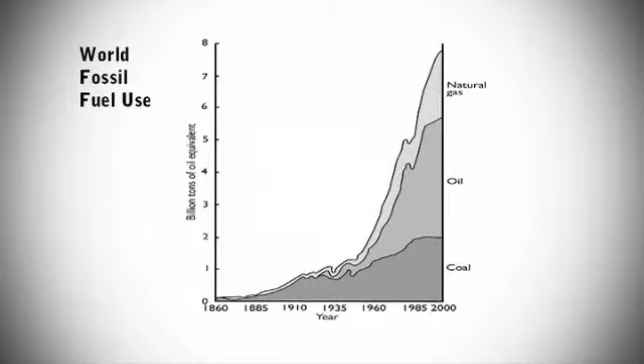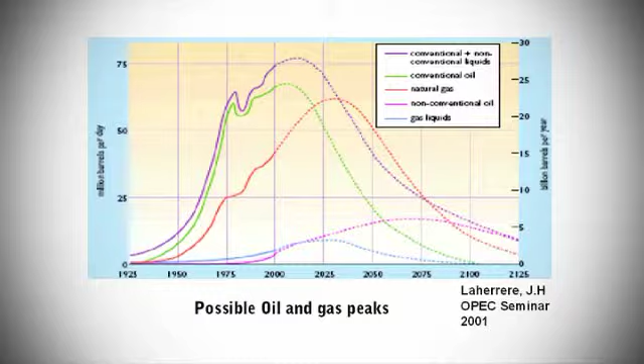Quick run through. We all know the story. We've been using lots of fossil fuels. Rate of fossil fuel use has gone up with the industrialisation process. One of the possible issues that's been worrying people for the last few decades is the imminent shortage, scarcity or increased price of various fossil fuels. That's at traditional oil and gas peaks, but people have also been talking about coal peaks and maybe even uranium peaks, solid material peaks of resources. But long before we reach that, it's argued, maybe before we even try to reach that, we should stop using these scarce resources because of the other big issue, which is the climate change one. The debate is out whether climate change comes first or peak oil comes first.

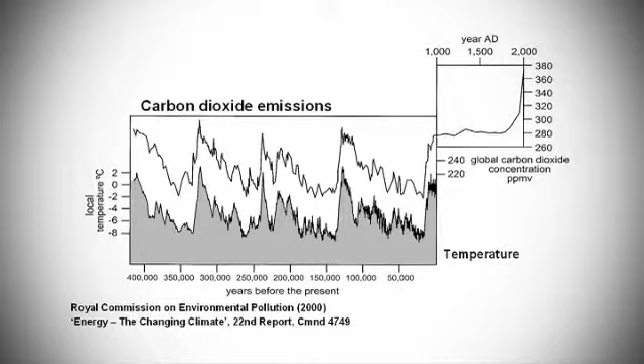You know the climate change story. The level of emissions has shot off the chart, and it looks like the temperatures are following, although we can't be certain quite how tightly they're following. Predictions, though, show us going up into the 4s and 5 degrees unless action is taken. So that's our starting point. Does it matter? I mean, if it didn't matter, we could just enjoy the ride. On the left here is what happens if all the seas expand at 6 degrees and all the ice caps melt. Which means Birmingham becomes the capital of the UK, which is enough motivation, I think, to make anybody act quickly.

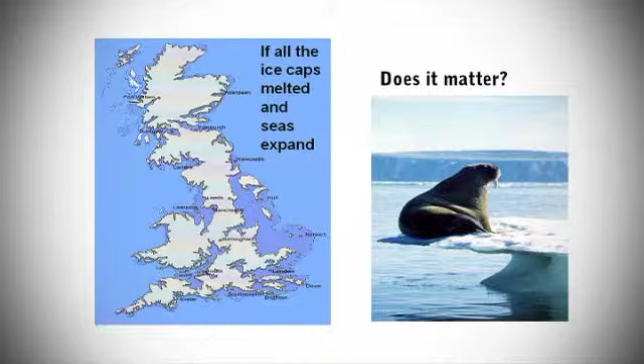On the right is the sub-story for the Guardian front page as to another reason why you might want to respond, but carries less immediate impact as far as I'm concerned. But the financial argument, this economic argument, is also strong. The control cost, the cost of doing something, is significantly less than the cost of not doing something, by something like a factor of 10 or 5, depending how you want to do the sums, according to Stern. In which case, action taken now makes sense.

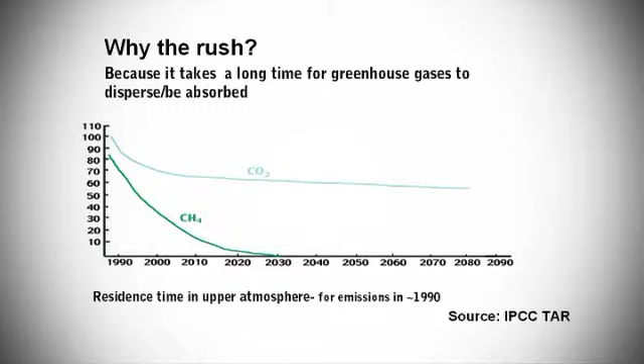There's a reason for moving quickly, because carbon dioxide has a long residence time in the upper atmosphere, despite the interchange between sea and sky, much longer than methane. Effectively, once you put it up there, it's there for a long time. If we stopped at year 0 or 1990 there, we'd still be at more than half levels many hundreds of years later. So the earlier you start making reparations, the better. And the longer you leave it, the more it's going to cost you. So urgency is the issue.

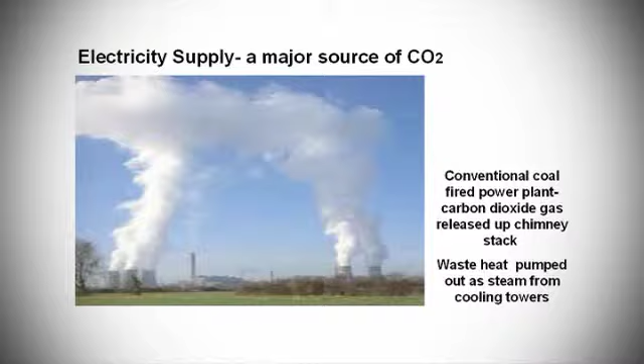Engineers look at pictures like this on television, and the voiceover says, climate change. And they say, well, there's an awful lot of steam going up there, yes. That's not much of a problem. Well, it's a little bit of a problem. But actually, the real problem, as you know, is coming out the chimney in the middle. But also, this steam is another giveaway. If you're an engineer, you say, oh yes, why have we got this vast amount of steam coming up? We'll have a look at that in a minute.

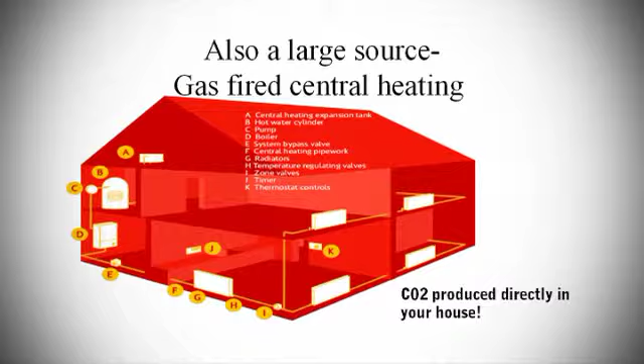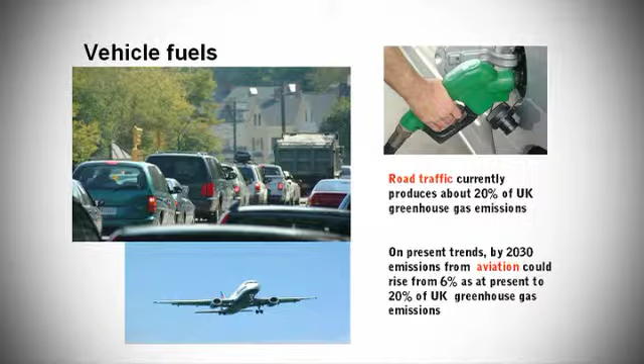The elephant in the room that I keep trying to bang on about is that we keep talking about aircraft and power stations and cars. We forget that every single house has got a gas boiler sitting in there, churning out carbon dioxide in your own home. Probably about 40% of total carbon dioxide is coming from this machine in the corner of your basement or wherever it is. And yet we don't mention that much. Gas boilers, even combi boilers or condensing boilers, are a major source. But of course, we're all familiar with the guilt-tripping aircraft and car use arguments for climate change. Those are the three big areas anyway: power stations, gas, and transport.

What can you do about it? Here's a list of actions. Sequestration, somehow or other capturing and storing the carbon dioxide; using lower carbon fuels, switching to gas from coal, which is a 40% change if you're doing it in an advanced combined cycle plant. Generate the energy more efficiently, stop voiding so much steam, combined heat and power. Use fuel more efficiently when you actually produce it, get more use for less energy.

Use non-fossil fuels. The two obvious and only options at the moment are nuclear and the various renewables. Then there's a whole series of social solutions, which I'm not going to look at. Steve Peake later may talk about some, which is we use less or change our lifestyles to use energy in different ways. And then finally, there's another area of adaptation. If all the above fail, we just take it on the chin and see how to adapt our way of life and our planet and our living style in response to climate change.

Now, the more you look at this, the less chance there is of being able to adapt to the scale of change. If we're up to 6 degrees, then the scale of adaptation becomes probably beyond what most countries could afford and what most people can accept. So I tend to want to treat these as not just first tries. These are desperately important, all these earlier stages. We can't just sit back and wait to adapt.

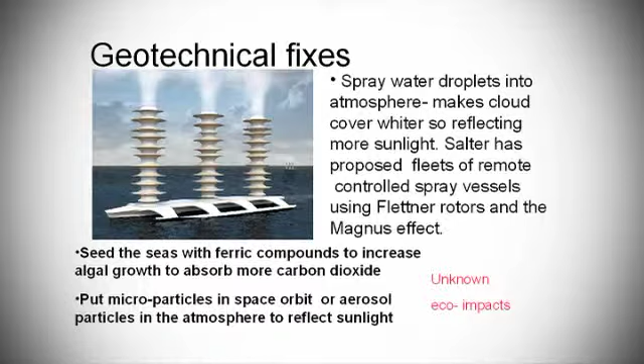I think there was just a question in terms of the size of the towers. Yes, the previous slide. The scale of the towers that you showed us on the previous slide. I think this is a sort of size of a major cruiser, not a full battleship, but something like that, big. No people. Remotely operated. They cruise around the sea, fleets of them, hundreds of them, looking for crucial places to... I'm trying to be straight-faced here, but I do find it a little bit wacky.

These rotating towers generate the energy to squirt the water vapour up into the sky. There's tidal energy connected to drive it around. It actually steers itself around. The idea is to find places where you can have maximum impact, because you want to avoid precipitating rain in some areas. Other areas you do want to. You're doing climate modification on an international scale. So the sums look... in energy terms, it actually does work. You could do it. Sorry.

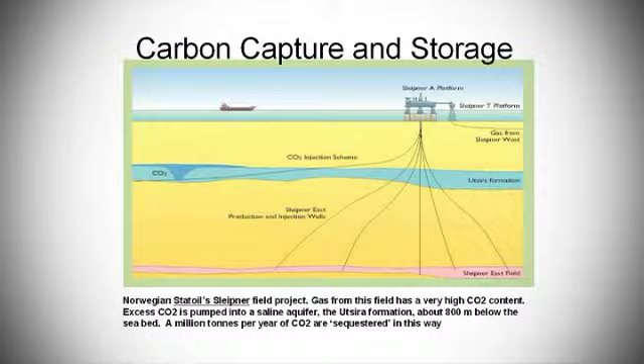It seems sort of symmetrical to take some oil or methane out and then burn it and grab the carbon dioxide and stuff it back down again. There's a sort of symmetry, but otherwise, in engineering terms, it seems pretty inelegant to try and drag stuff out of the exhaust of power stations and stuff it underground under pressure and hope it stays there.

The attraction is that it allows the oil companies to carry on much as before, except it now costs them twice as much. So the attraction of carbon capture and storage is it allows the show to continue for a period. I find that a little bit evasive. This is really bad engineering, sticking something on the end of the pipe and squirting it into the ground. But it can be done, and I'm sure it will be done, because it allows you to carry on burning coal, oil and gas for some period.

Much more technologically sweet, if you like, is dealing with the problem that's nearer to the source and avoiding energy waste in houses and other buildings by all the obvious energy-saving building envelope design and add-ons to improve the energy efficiency.

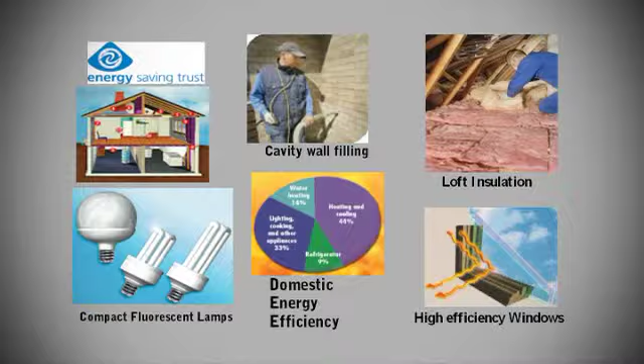I mean, the Finnish Minister of Energy came over a few years back to talk to us and said he couldn't believe that 6,000 old-age pensioners die in Britain every year of the cold. He said in Finland it gets cold and people die, yes, but never indoors. He couldn't imagine how we could have buildings that would kill people. So there are things you could do to improve buildings. And this country, having just a low starting level, there's a lot of room for gain there.

Wave energy is harder. You're dealing with an interface between air and water, which is chaotic at the best, whereas underwater water turbines, you've just got 4 movements of the water every day in a nice laminar flow 20 feet under the surface. Submarines are much easier to build than ships. They don't have to take so many stresses. Some examples of underwater wind turbines or tidal current turbines. The big area, I think, of development is Britain's strong card. We have a very big resource of horizontal tidal flow, and we fortunately seem to be at the front of the technology of that at the moment.

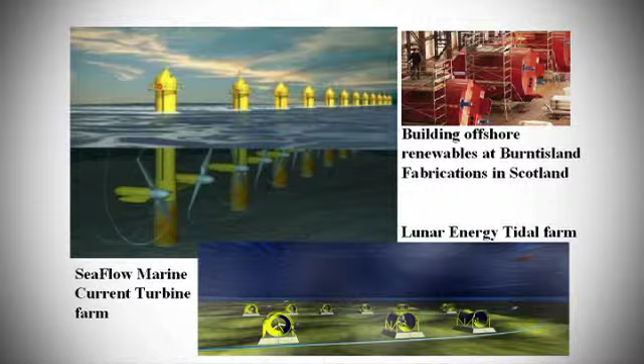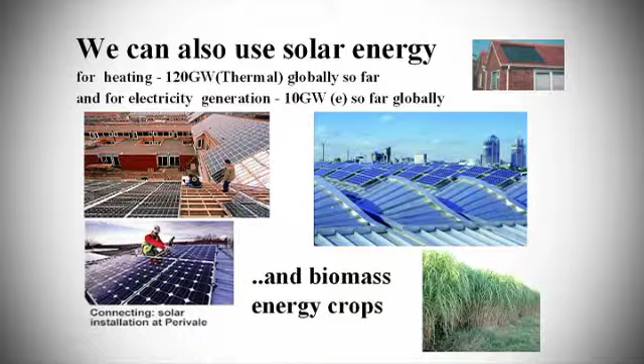Now those sort of numbers kick around for most countries, and this is now looking fairly conservative. 50% by 2050 seems to be the going rate; most industrial countries can achieve that if they want to. And of course a lot more. This is just the relatively straightforward approach. So that's your ballpark, half electricity by 2050. Now, we may need to do a lot better than that.

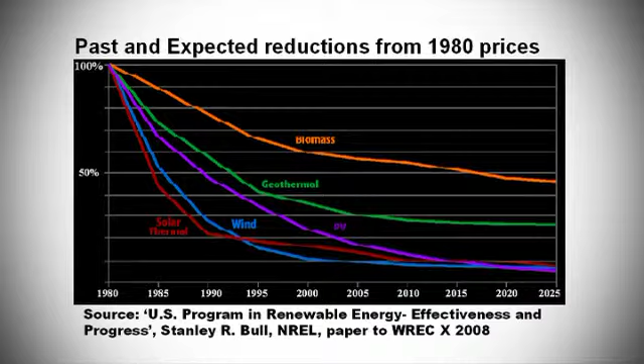The price is the other thing that is interesting. That's dropping as you would expect as the technologies physically develop and the markets for them expand, the unit cost goes down. Here's an American NREL study showing the percentage drop since 1980, with wind dropping very fast, biomass not so fast, PV very fast.

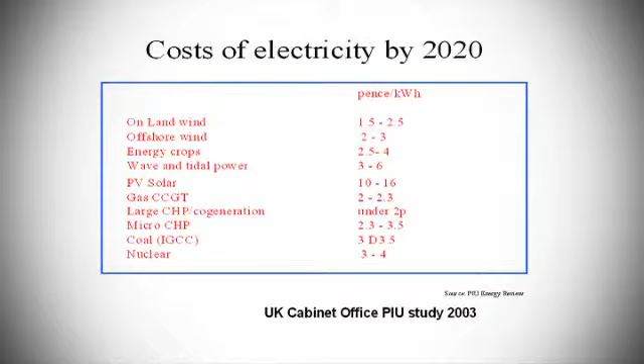The UK Cabinet Office did a study. Some people here, I think, were involved with it. I was as well, briefly. For 2020, electricity prices for the various options. So you can see the renewables all looking very competitive. The more traditional coal, gas and nuclear looking not so competitive. That was a few years ago.

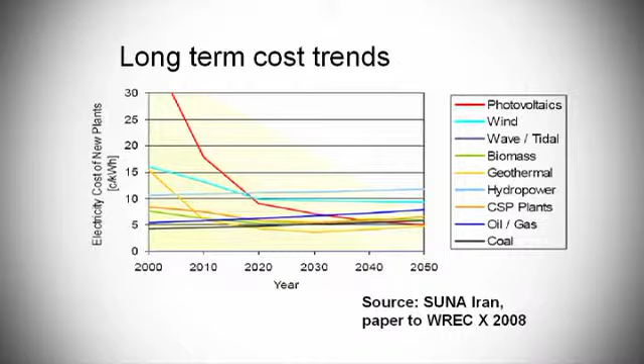Here's the most recent study I've come up with showing long-term costs, sort of learning curves basically, by 2050, with PV the most dramatic reduction in price, photovoltaic solar dropping very rapidly. This, interestingly, is from Iran, should you be interested in taking an interest in renewables. Most of the fossil fuels are seen as just sort of chunking up in 2% a year price increases.

Okay, here's where I'm going to try and move to a quick look at the renewables by scale. The full shopping list looks like big stuff, but in fact, small stuff is equally important, or can be equally important. So the scale is house level, the city level, the country level. So at the house level, people often argue small is beautiful. Small generators can be nearer to the load, therefore there's less losses in the transmission. You can overstate the losses in long-distance transmission, maybe 10% over a thousand miles. So building a technology into a house has some attraction.

And as you'll be aware, the last few years we've seen a whole range of so-called micro-generation technologies, micro-wind, PV, solar heating, small-scale combined heat and power, and heat pumps and fuel cells and all other mixtures of not totally renewable, partly fossil fuel-fed options, but all small, kilowatt-sized machines to be built into houses. And there's a lot of talk about this.

Now, the problem is, back to the engineering again, simple physics of wind generation: it's square of the diameter of the blade, cube of the wind speed. That means if you go up, you get a vastly more increase in power. If you go down, your power drops off very rapidly.

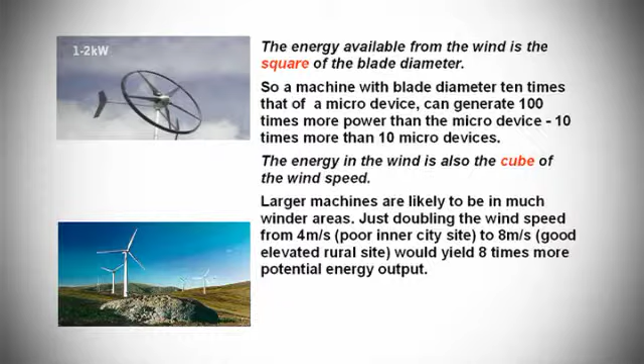So a tiny wind turbine, the 1 to 2 kilowatt, the iPod of the micro wind world, is the machine up there. You're going to get very little energy out of it, particularly in urban environments. The Building Research Establishment study suggested that the small turbine on top of a building like that, and that's a particularly good site, that's a tall building. In many urban environments, you're not going to get enough power to pay back the original energy debt, the materials and carbon invested in the construction, much less the actual cost debt.

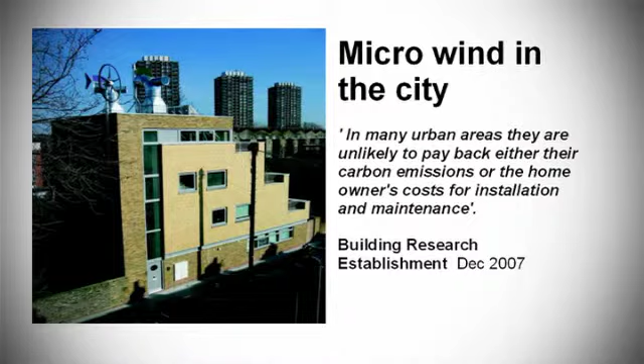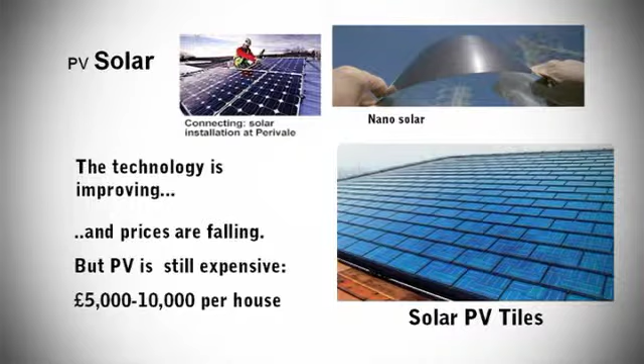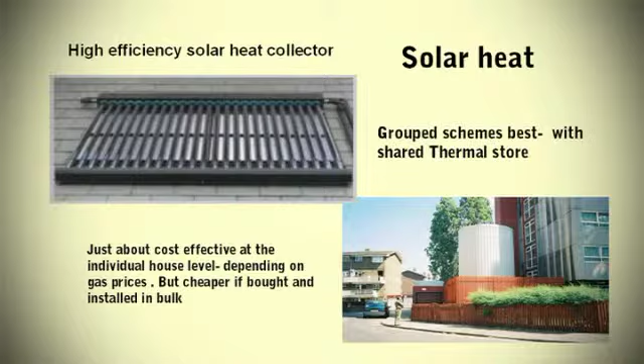So the initial enthusiasm for micro-wind is somewhat reduced, but there are locations where small-scale wind will work. PV, a bit different. There's no scale issues on that. You can have it any size you like. Volume efficiencies. Solar heating, again, there are some scale attractions. Very large solar arrays across a whole row of buildings where you share a heat store, because this is a Danish heat store, gives you some advantages. If you have a heat store scaled to 20 houses, you get much better storage capacity than if you have 20 individual heating units, because the volume and area effect are different.

But small is clearly not always beautiful. Interesting report from the Energy Saving Trust last year saying basically until you get up to about 500 houses, the costs are prohibitive, but around about 500 you start getting advantages. What they're basically saying is that the community scale is the best scale to operate on if you're talking about localization of technology. Community scale, depending on how you define community, small enough to be technically located locally, but also big enough to be reasonably economically efficient, small enough to be locally controlled or possibly even owned, possibly even managed, but big enough to be not a waste of time in engineering terms.

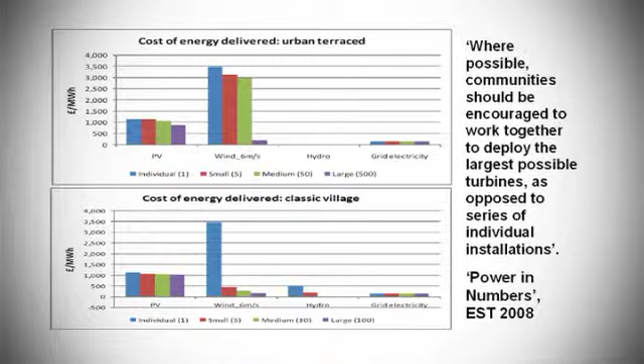CHP, well, micro-CHP also got a fairly big push behind it. The trouble is, the way they've been set up at the moment, they're following the heat load. You run it for heating. Electricity it produces is additional, which means in the summer you're not likely to be running it much at all, which means your overall annual efficiency on the electrical side is very low. So I have a bit of a rethink of the viability of micro-CHP as a total energy system. So we begin to see some of the disadvantages of small scale.

If you move up to bigger CHP, it's digging streets up, connecting up big heat loads, which of course has happened widely in the rest of Europe, but hardly at all in this country. Your efficiencies start jumping up dramatically to sort of 70s and 80% total energy efficiency.

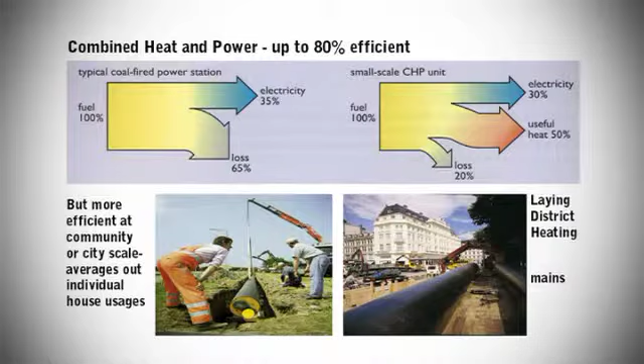One area that's done this is Woking Borough Council, who've CHP'd a lot of their area with a local heat grid and also a local electricity grid. They've decoupled themselves to some extent from the national grid system, providing electricity power on a private wire network around municipal offices and a few schools, hospitals and hotels and things. About 70-odd% of Woking's large buildings now are on the local borough council's energy system, heat and electricity.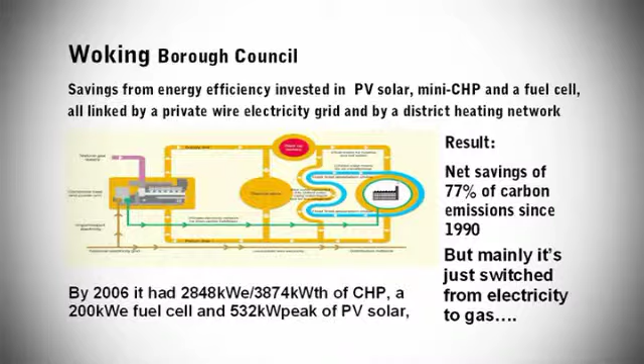The result is since they're mostly generating off gas now rather than electricity, they're still importing stuff, it's gas they're using, but they've switched over to using gas for electricity, and that's reduced their carbon impact by a significant amount. But of course they're still importing gas, so it's not an autonomous system.

The same for some of the London proposals. The late lamented Ken Livingstone's plan for London was, well, here's the full width of it, but the upshot of it was, at one stage anyway, to get 14% of London's electricity from renewable sources. Not a lot, 14%. When you actually look at the small print, only 4% actually would be coming from internal in-London generation. So all the rest would be imported.

So what I'm trying to argue is that the small-scale dream that we can do it all locally is very attractive, and we should do as much as we can. But it looks like, in reality, for the moment at least, it's always going to be a small player. There's always going to have to be a lot more imports from somewhere else, the rest of the country to start with, or perhaps further afield. PV solar is the big hope for the future. I'm going for big here.

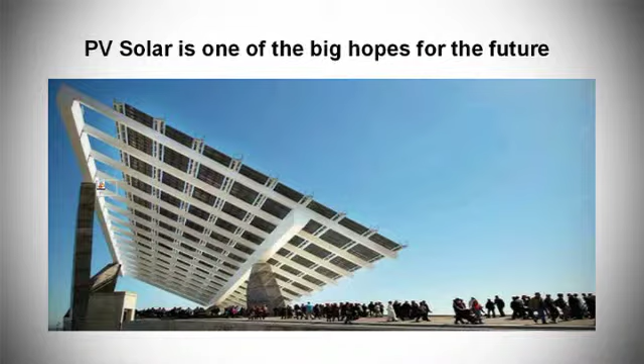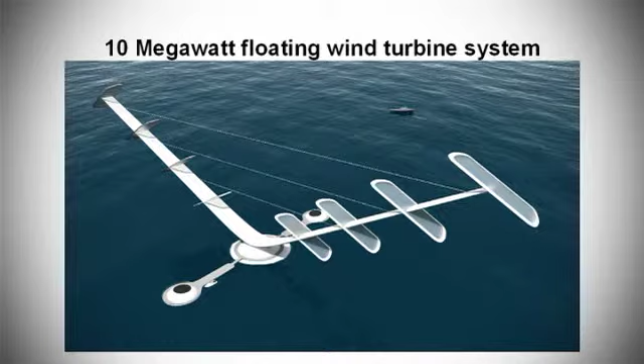I've mentioned before tidal stream. There's some big tidal stream ideas. Big wind. At the moment there's a 5 megawatt wind turbine being built, but this is a 10 megawatt design concept. When I let the engineers loose on the drawing board, they come up with, I mean, you asked earlier how big. Here's the cruise ship now to give you a scale there, right.

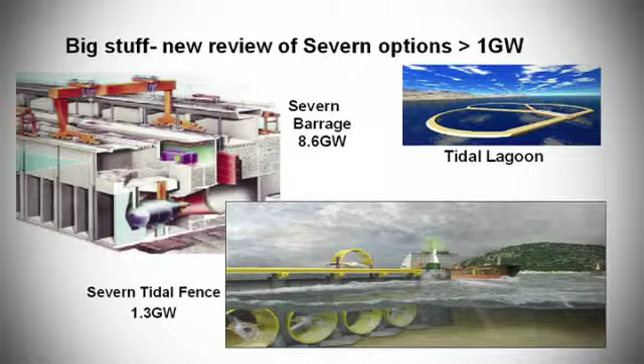Big machines. This is a horizontal axis machine, right. You can see the engineering moving on and delivering increasing amounts of power. Big marine technologies like the Severn Barrage, 8.6 gigawatts, or possibly better, a tidal flow system that doesn't block off the whole estuary, where you have turbines that allow just the water to pass through.

Costs. Just out of interest, the Severn Barrage up there at £30 billion, the largest civil engineering project a country ever thought of. Very expensive in pounds per megawatt hour. Why you do it, I've no idea. I'm very uncertain about that. Wind around here, nuclear is sort of in the middle. This is one particular chart. When you challenge economists, you'll get charts with figures that differ. These at least have got some ranges on.

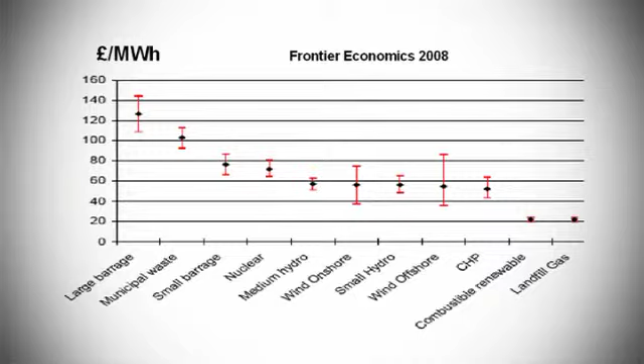Since I mentioned nuclear, let's just dispatch that to the oblivion it should belong to quickly. Can't help much in the short term, 10 years to plan and build the things. Can't help much in the very long term. There's not enough high-grade uranium to go beyond, being optimistic, 100 years. If you're talking about dealing with climate change on a significant scale, then you run out of uranium. Not you run out, the prices get very high.

In the meantime, between the long and the short time, you're facing all the obvious problems of accidental leaks and emissions, long-term disposal of active waste. I notice Obama has just abandoned the Yucca Mountain project in America, so America still has nowhere to put its waste.

Your local friendly Iranians will no doubt be interested in not making bombs from their nuclear power plants, and people have called nuclear power plants pre-deployed nuclear weapons that we've equipped our countries with for terrorists to use. I think that's rather overstating the case, but it is not wise, I think, to have more plutonium as the basis of your future energy system. I would prefer not to do that if there are other options, and it does seem plainly there are.

Most of the renewables are much faster to install. You can put a wind farm up in months. They're cleaner, there are no emissions from wind or solar or whatever. They're safer, not too many people fall off roofs when installing solar collectors, although they do. No emissions, no waste, no proliferation, no terrorist threats, no fuel resource depletion. It seems like an obvious option.

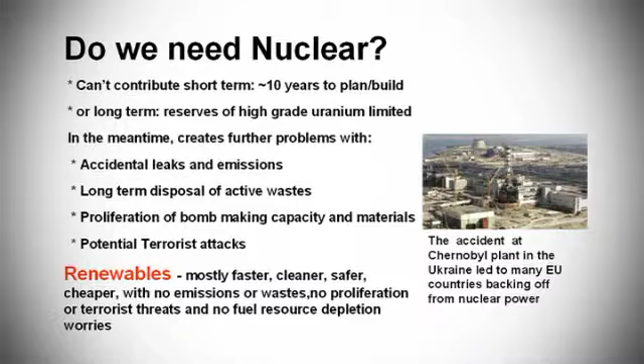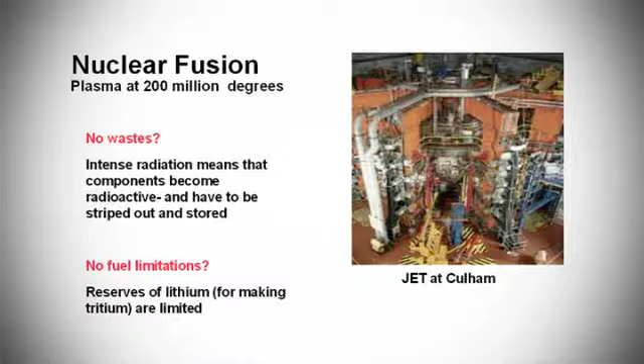People, though, do say, well, yes, renewables is very nice while we sort out fusion. I used to work in fusion for a bit. I always get a bit annoyed when people say this solves the energy problem, A, because there's no waste. Well, no, everything inside this thing gets fiercely irradiated by neutrons. You have to strip out all the materials and store it somewhere. Maybe a couple of hundred years worth of radioactivity by induced radiation, but still not a non-issue.

Fuel limitations, well, lithium is where you get the tritium from, and we're busily using lithium up in not just PCs, but cars. And increasingly, there's going to be a battle for lithium in the future. Fortunately, there's lots on the asteroid belt. So if we do crack fusion, we can build spacecraft to go to the asteroid belt to get the lithium to run the fusion reactors.

I asked the Atomic Energy Authority a couple of weeks back, in fact, a big report they sent me really surprised me. They said, if we can crack fusion, and they're trying to spend another £20 billion, half our R&D budget for all energy goes on fusion, it might, by year 2100, generate globally about 20% of energy. And I don't know about you, I always assumed that if they crack fusion, this would sort out the energy problem and we could all go home. Then this is the Atomic Energy Authority saying, we're going to have a huge amount of effort.

In 90 years' time, we might be able to produce as much energy as we get from renewables now, today. So I thought, this is much worse than I thought. A, it's not guaranteed to work. B, who knows what it's going to cost. C, anyway, I leave fusion, I think, aside as a very uncertain long-term option.

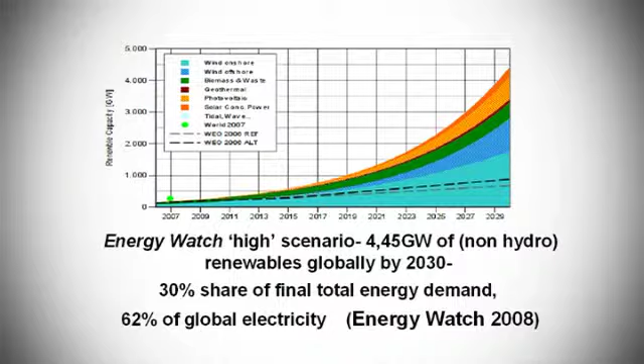Renewables, by comparison, the sunny uplands of renewable futures seem to be being offered to us. This is a recent scenario by Energy Watch in Germany, who are saying 62% of global electricity by 2030. Now, 10 years ago, when we said things like this, people used to fall about laughing, and now we're not laughing so much. I think when you come back in 10 years' time, these sort of figures will start looking standard, but at the moment it's still treated as, well, that's pushing it a bit.

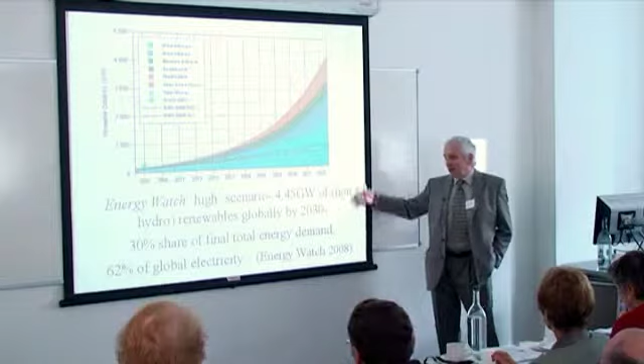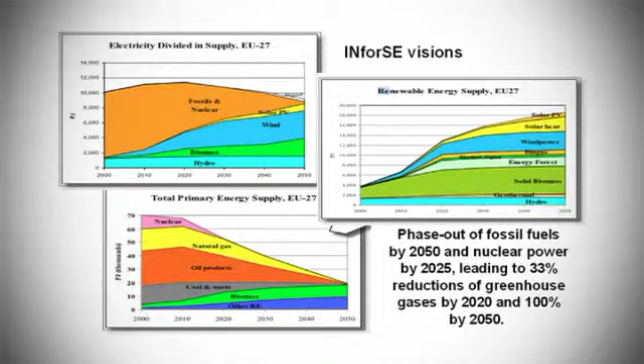But when people say 100% by 2050 of total world energy, people are now still falling over laughing, so that's good. We've got the measure of it. But the falling over and laughing point is around about here. But I think in 10 years' time, 100% by 2050 would perhaps be government targets. Who knows? But this is the INforSE view from Denmark, with renewables ramping up and energy conservation, of course, taking a big chunk. There are people here who do scenarios for a living, so I'm aware I'm treading on thin ice here.

China, who's much attacked usually for being the problem country, has actually got some quite ambitious targets and huge potentials. I mean, the uplands of central China, 100 gigawatts of wind, easy. You're talking about maybe 10 times that is conceivable. So the sleeping giant could actually be changing a lot. And people attack China for being problematic.

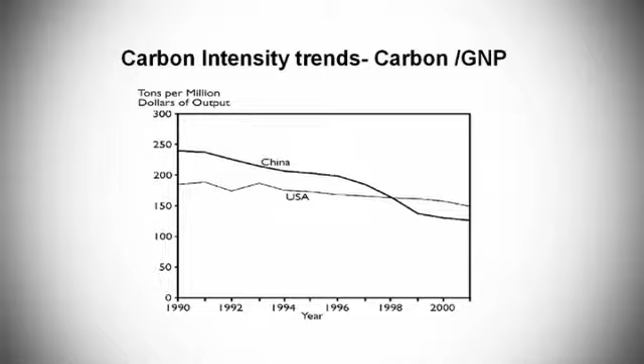In fact, the carbon intensity of Chinese economy broke through the gap with America about 1998. What this means is you've got a rapidly expanding 8% growth country, in many cases with greenfield sites, new technology, being able to outpace a country with pretty old clapped-out capital. So whether they can continue to keep ahead in carbon intensity is another issue.

South Korea is joining the game. Huge wind, wave, solar, but tidal stream in particular, and tidal barrage. So altogether there's about 2.6 gigawatts worth of tidal projects scheduled to start up in South Korea by 2010, 2015. Now, you've hardly heard about this, I'm sure, but this will be some of the biggest new renewables established in the world. I mean, we're still discussing, after 100 years, possibly doing something about our tidal resource in Britain, and they actually started 2 years ago and said, right, we'll have 2.5 gigawatts installed by 2015.

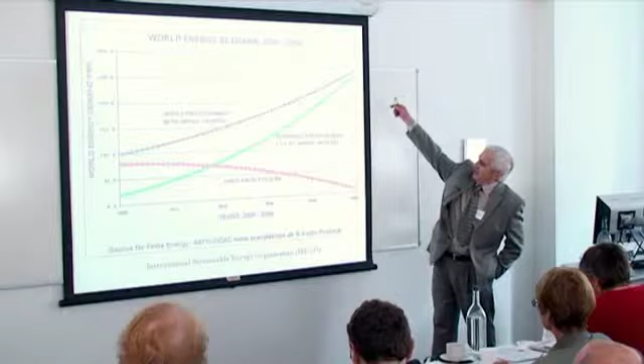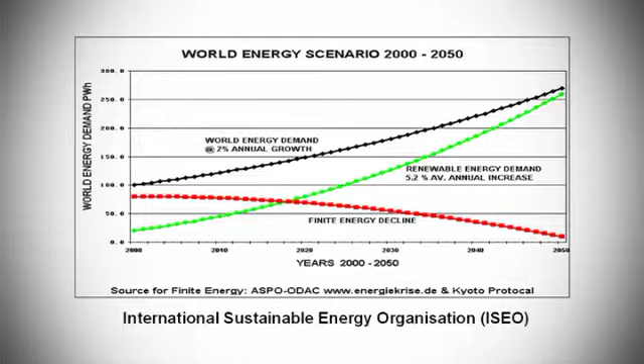So here's a mechanical, arithmetical thing. If you run up renewables by 5.2% per year, average, and you assume demand goes up by 2%, they can actually meet each other and let all the others, coal, oil, gas and uranium, go to zero, roughly, by 2050. So this is the test. Well, can you get 5.2% growth? Well, Germany's been getting 20 and 25% growth in wind for the last couple of years. Other countries perhaps not as well. 5% globally is pushing it, but it's not crazy.

You can't say that's completely out of the question; it's conceivable to imagine if you happen to want to press all the right buttons to do what I was saying, 100% by 2050. I'm not saying it's going to happen, but I'm saying this is a simple test. It's not obviously stupid as a perception. Except and unless you look at the reality, and here's where we are at the moment.

So maybe we'll have to rely on other countries a bit, to have a Europe-wide sharing arrangement. An international power grid. Could be electricity, but could also be hydrogen. People have said which type of transmission is most efficient. There are some attractions in hydrogen. Shoot it along pipes.

People have argued that we've actually moved from solid historically through to liquids and to gas. We started off on wood and coal and then moved to oil and liquids, and then gradually moved to methane and hydrogen. This is a logical, technical progression.

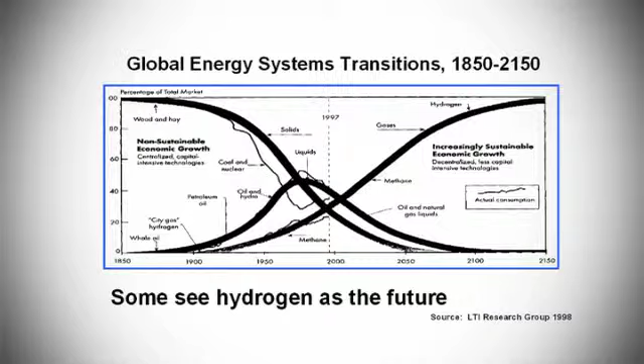The trouble with hydrogen is the use for vehicles, which is the most obvious one. Direct wind to car battery, 86% efficient. Indirect wind to electrolysis, to hydrogen, to compressor, to fuel cell, to vehicle, 25% efficient.

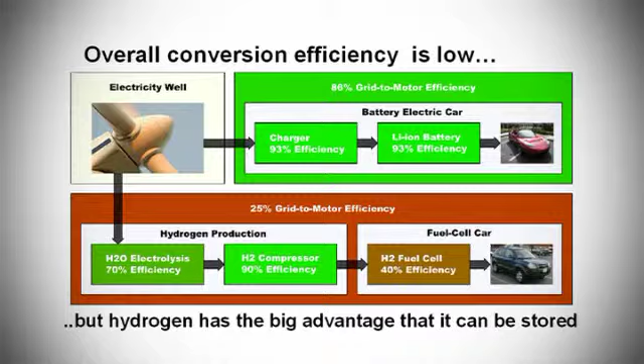Once you start playing with the complicated technologies and switching between media, rotation, electricity, hydrogen, back, forward, you start losing energy on the way through. You can rescue some of that energy, actually, but even so, it's beginning to look like electricity transmission and electricity will continue to be the end use that we'll use.

And of course, once you start thinking out of the box of national economies, we do this. Solar in the desert, wind in the North Sea, hydro in the north, biomass in the middle. Use each country's strength, and balance it out by a huge interchange of energy on a high voltage DC supergrid.

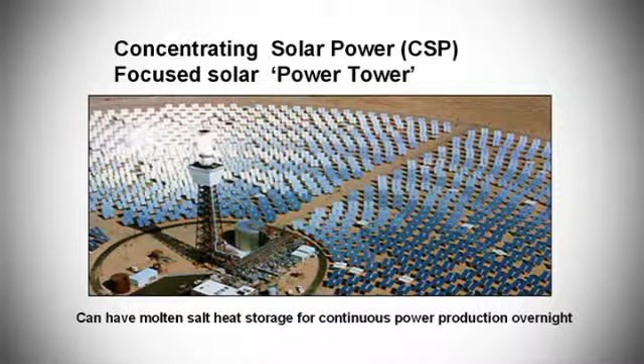In the south, you've got solar in the desert. These are focused mirrors on a power tower with a big molten heat store. So you store some of the heat overnight to carry on running steam into a turbine so it can run 24/7. Half a dozen of these are being built as we speak. There are connections being built across the Mediterranean, from the ones in Morocco, Algeria, Tunisia, wherever. This is the one that's being built at the moment, going up into Germany. Big, concentrated solar power is reckoned to be the future.

Disadvantages and advantages. Low transmission losses, because it's high voltage DC, so maybe only 2% for 1,000 kilometres. Probably makes sense to get solar energy where it is. It's hard in Aberdeen, easy in the desert, do it there. On the other hand, this could be an excuse for us not to do anything here. Oh, we'll just carry on buying in power from outside like we've always done.

We'll switch one lot of Arabs in one bit of desert to another lot of Arabs in another desert supplying us power. This is maybe a good thing. If it was fair traded, this might help the North African area to develop its economy. Maybe this is something we should be doing. On the other hand, we could be cut off suddenly by the Algerians pulling the plug on us in Northern Europe. People are talking about something like a 20% supply from outside of Europe.

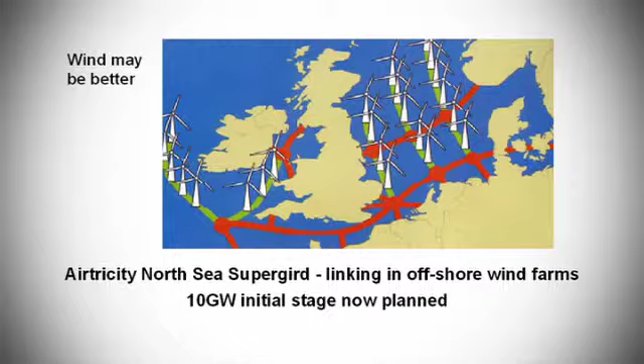So if we're not going to be able to rely on this particular grid, we've got to build a new one, which is fed with power from another point. Well, the North Sea is one place, we've got all that wind. But also not just the old Europe, the new Europe has a lot of offerings. Just at the moment, a simple example, Bosnia-Herzegovina, Croatia, Macedonia, all running at percentage electricity shares much higher than many other countries in Europe.

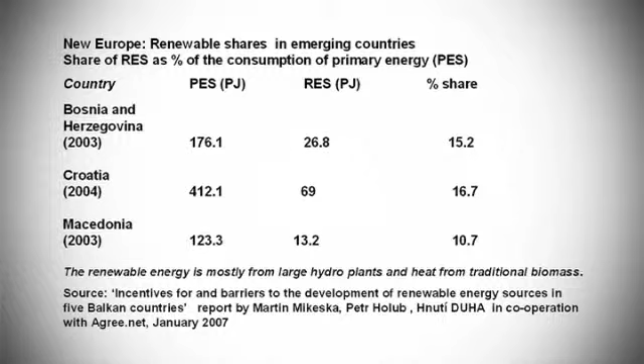If you look at the resource potential, I know we're running out of time. You have run out of time. Yeah. Huge wind resource potential for some of the new European countries.

The point I'm going to make is that if we move outside Europe as well, even larger, Kazakhstan, Turkmenistan, all those, I can imagine in 10, 15, 20 years, the peripheral areas of Europe, some of the stans, North Africa, will be the main energy suppliers. We'll be having this huge energy grid around the country, supplying us from southern Morocco. Just come back from there. Huge amount of wind potential. This is changing the whole perspective.

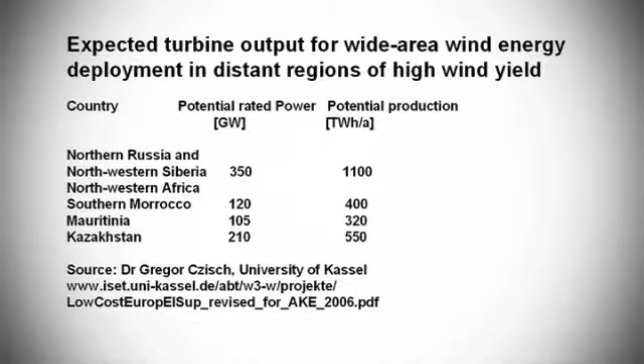Our whole view is Eurocentric. Once we start thinking outside of the European belt, things are going to look very different. Geopolitical issues, just think your way through. The whole politics is going to change. The European Union's keen on doing this to some extent. It allows you to import power by various means, emission credit systems and joint implementation and CDMs and all that. Should we do it? Well, we're arguing about whether we should allow countries to import power and not do it themselves, which lets them off the hook.

But it really doesn't matter where you make the carbon savings, actually, as far as the planet's concerned. You do it cheaper in Albania, you do it in Albania. It's the same carbon that's not being emitted wherever it comes from.

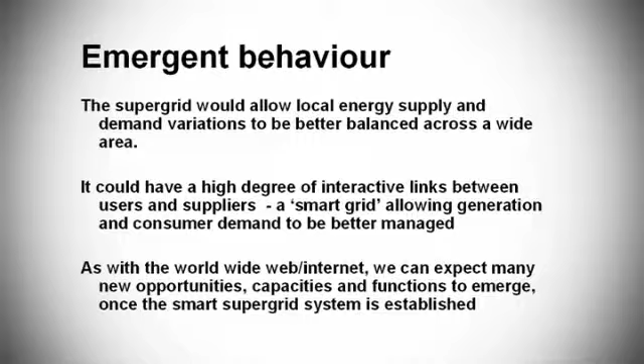Quick final conclusions. Small can be okay, but you probably need a supergrid to glue the whole thing together. It's a bit like information technology. We started off with large, big machines, broke it down to decentral PCs, and then glued it all together again with the web. Maybe we can do the same with energy. Supergrid would allow local stuff to supply and help balance variations across a wide area. You can have interaction between the small grid and the larger demand system.

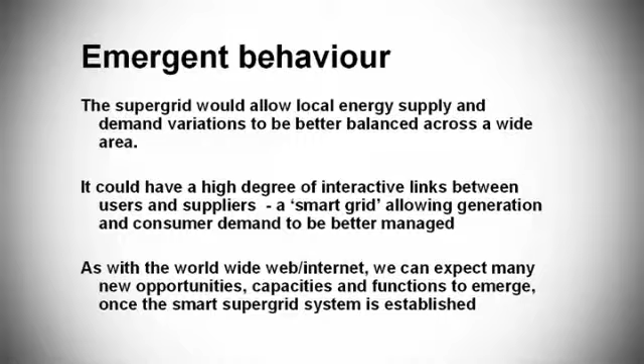So there's a lot of possible issues. The whole thing could look very different in 15 years' time. And we don't know how this big system will actually operate. It's a very new area. The emergent properties of this new system are the sort of thing we can discuss.

To finish off, Obama saying the same thing for America. So the supergrid issue, I think, is going to get very big because it changes things, if you can cope with the geopolitical negotiation issues. I know I'm well over time, so I'm going to stop there.